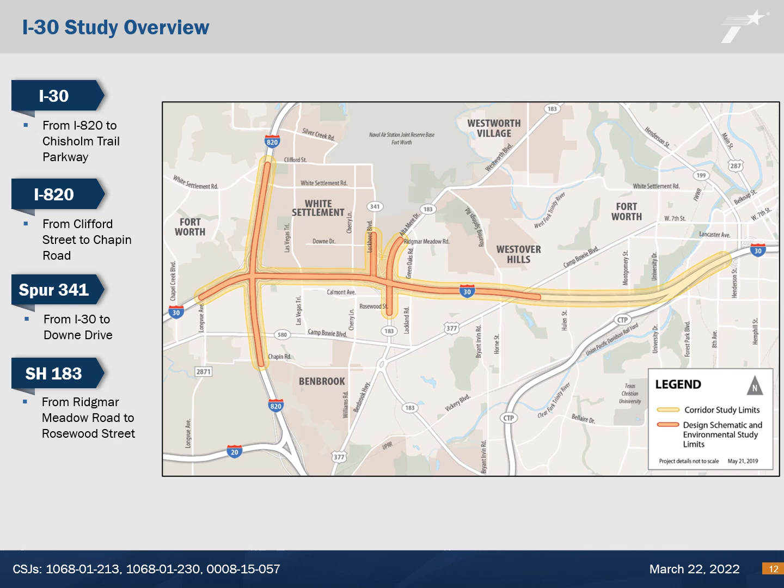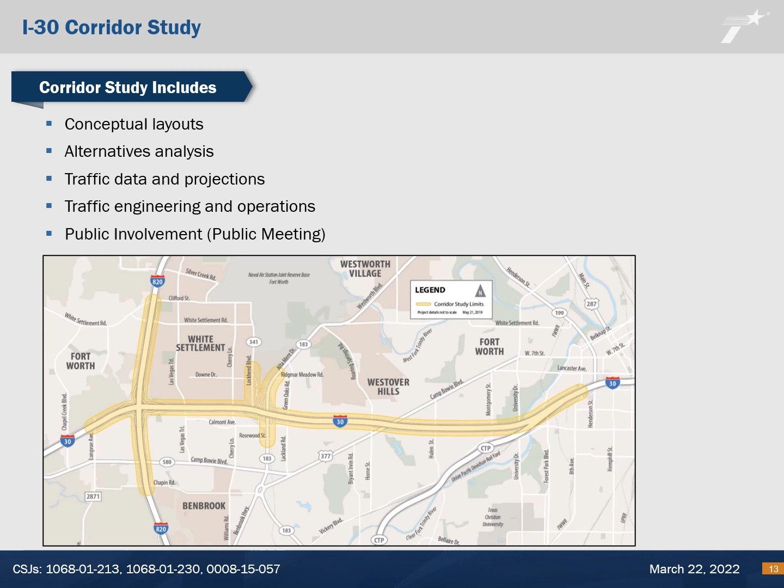The corridor study includes preparing conceptual layouts, an alternative analysis, traffic data and projections, traffic engineering and operations, and public involvement. The limits of the corridor are shown on the map in yellow. We are currently in this phase of the project.

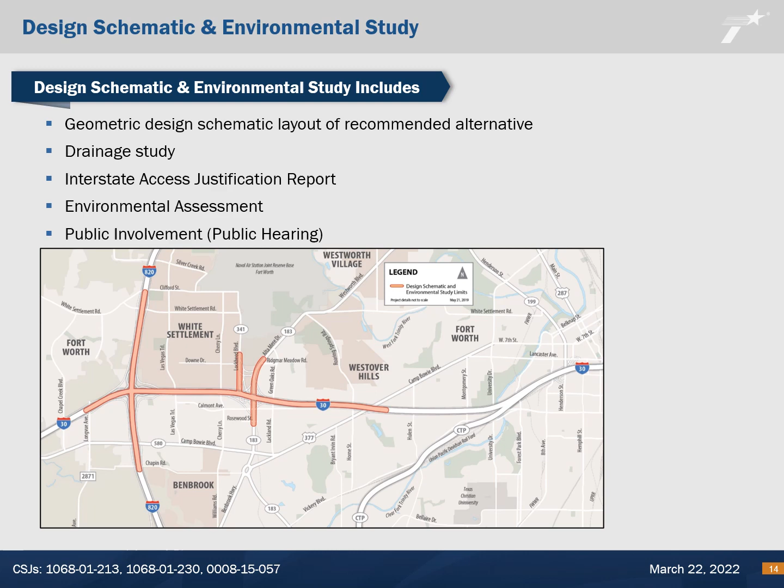The design schematic and environmental study stage of the project will include geometric design schematic layout of the recommended alternative, a drainage study, an interstate access justification report, an environmental assessment, and public involvement. The limits of the design schematic and environmental study are shown on the map in pink.

Following this public meeting, the proposed design will be refined per public meeting comments where feasible. Once this is complete, this resulting design will become the recommended alternative and will proceed to the design schematic and environmental documentation phase of the project.

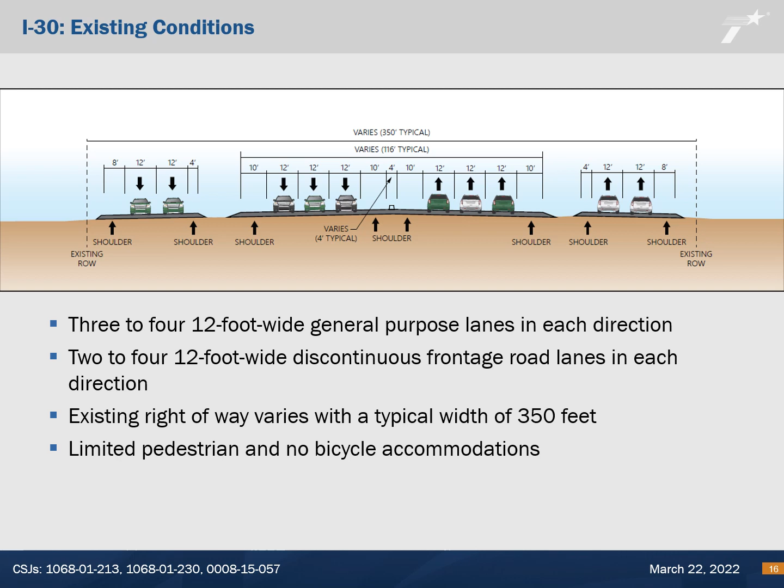An alternative analysis was conducted for the project to determine recommended improvements. The process started by evaluating various typical sections. The following typical sections were considered: no build, do nothing, a no build typical section maintaining 3 to 4 existing main lanes in each direction.

Additional general purpose lanes: a proposed typical section with the addition of 1 to 2 general purpose lanes in each direction. Concurrent express lanes: a proposed typical section with the addition of up to 1 general purpose lane and 1 concurrent express lane in each direction. Reversible express lanes: a proposed typical section with the addition of 2 reversible express lanes, with no additional general purpose lanes added.

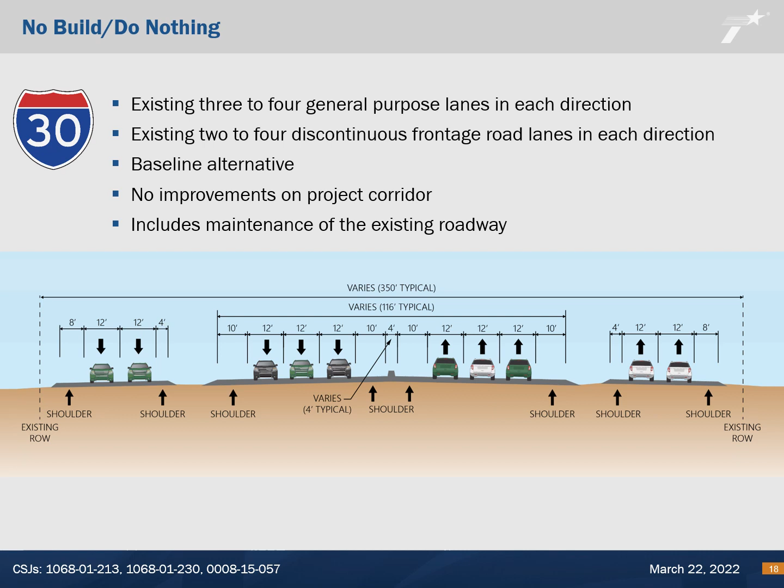The following slides will provide a brief description of each alternative and its typical section. The no-build do-nothing alternative would maintain the existing 3 to 4 general-purpose lanes and existing 2 to 4 discontinuous frontage road lanes in each direction. It would not include improvements to the project corridor, though it does include maintenance of the existing roadway.

The additional general-purpose lanes alternative would add 1 to 2 general-purpose lanes in each direction and pedestrian and bicycle accommodations. The alternative includes an evaluation of continuous frontage roads and would require additional right-of-way.

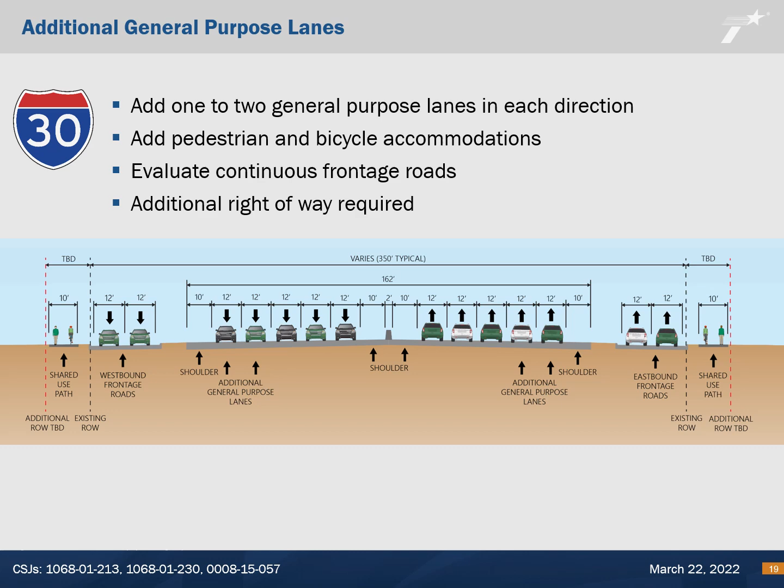Express lanes are typically built in the median of freeway corridors and separated from parallel traffic by barriers. Express lanes significantly have fewer entrance and exit ramps than parallel freeway lanes and allow through traffic to avoid congestion that results from local trips. Express lanes do not have a toll component, so they cannot guarantee a speed.

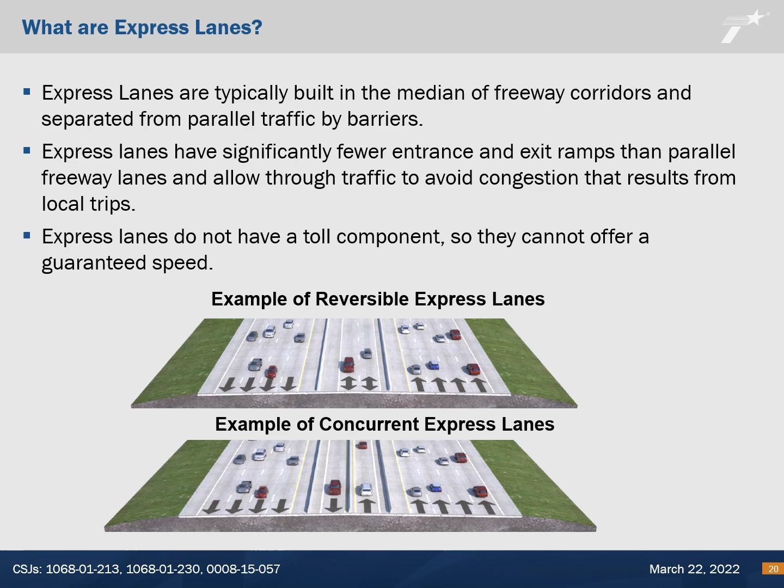The concurrent express lanes alternative would add up to 1 general purpose lane and 1 concurrent express lane in each direction, along with pedestrian and bicycle accommodations. The alternative includes an evaluation of continuous frontage roads and would require additional right-of-way. There was no tolling component considered with this alternative.

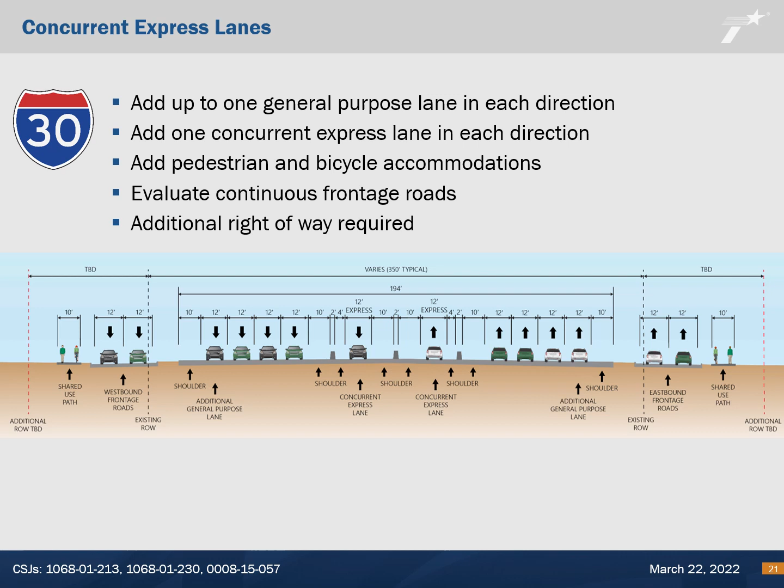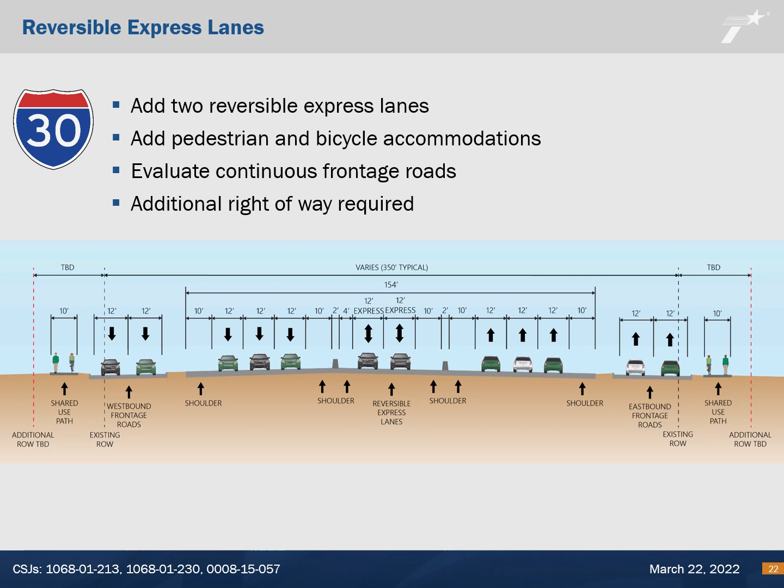The alternative analysis evaluation process begins with the development of 3 build alternatives and the no-build do-nothing alternative. The purpose of this evaluation is to compare the alternatives and identify those that would best achieve the study goals and objectives. See the project website for a larger version of the evaluation matrix.

Based on preliminary traffic analysis, this segment of I-30 has definitive peak hour directionality, meaning the morning traffic is significantly higher on the eastbound lanes and the evening traffic is significantly higher on the westbound lanes. The no-build do-nothing alternative could not accommodate future traffic.

Therefore, it was eliminated from further consideration. The 3 build alternatives were further evaluated with the following results. Because of the traffic directionality, concurrent express lanes would not be utilized to justify the significant right-of-way impacts.

Preliminary traffic analysis further concluded that reversible express lanes would not provide additional benefit compared to the additional general purpose lanes and would result in a larger right-of-way footprint, meaning there would be more right-of-way impacts.

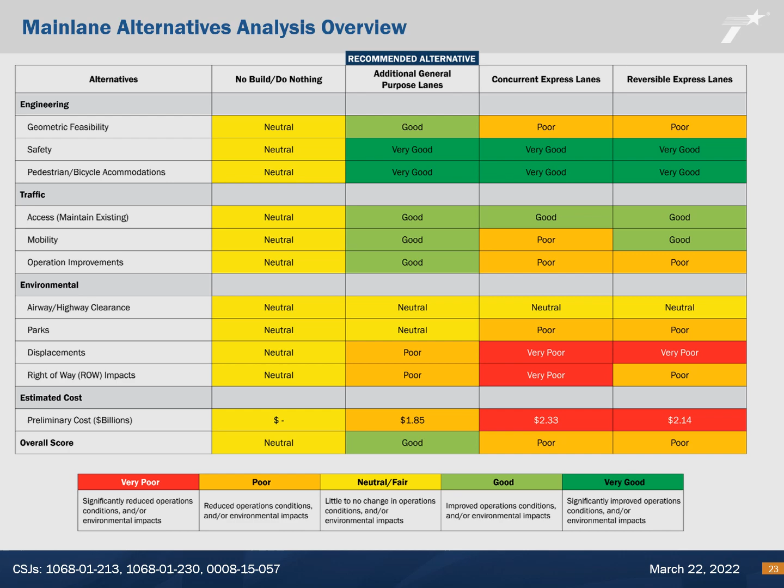The recommended alternative would provide 1 to 2 general purpose lanes in each direction, a 10-foot wide shared use path for bicycles and pedestrians in each direction, offset 5 feet from the frontage road curb, where reasonable and feasible. In areas where the shared use path is not feasible, at a minimum an 8-foot sidewalk would be provided.

Visit the project website at TxDOT.gov with the keyword search of I-30 West Corridor Study to see a roll plot of the recommended alternative. If you have any questions about the recommended alternative, please contact TxDOT for additional information.

Please note that as part of the alternative analysis, multiple interchange alternatives were evaluated at the Spur 341 and SH 183 interchanges, and we will go into further detail later in the presentation.

The interchange shown on the recommended alternative roll plot is one of the preliminary alternatives being considered. All interchange alternatives will be further evaluated as the analysis evolves, including traffic operations and feedback from this public meeting.

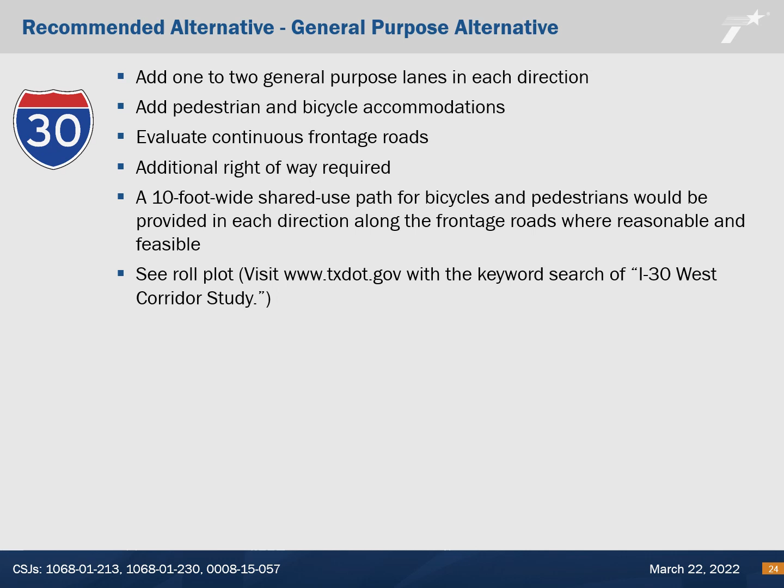The project team is evaluating deficiencies of the existing interchanges and has developed alternatives to reconstruct the Spur 341 and SH 183 interchanges to address the following safety, operational, and engineering deficiencies.

The current interchange does not meet current guidelines for engineering, does not enhance safety, does not provide pedestrian and bicycle access, does not operate well with today's traffic, and the interchange operation and traffic mobility will continue to deteriorate over time as traffic increases.

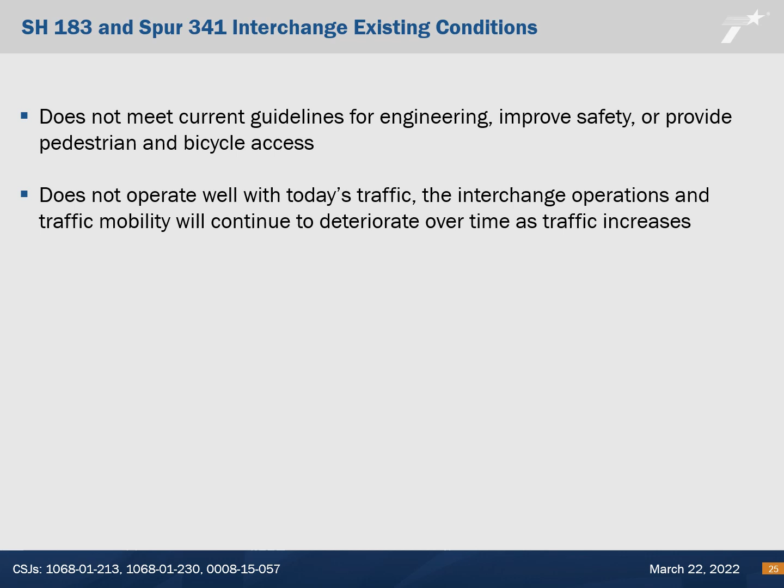2 alternatives were removed from consideration due to geometric feasibility or input from the February and March 2021 series of stakeholder meetings. Those include the SH 183 split diamond with westbound I-30 to northbound SH 183 direct connector, and the Spur 341 and SH 183 one-way pair.

The existing I-30 loop ramps to and from Spur 341 and SH 183 would be removed. The proposed exit and entrance ramps, both directions, would serve both 341 and SH 183. Compared to the no-build, the benefits to this alternative are the significant potential surplus of right-of-way, access to Spur 341, SH 183, and Cherry Lane, and consistency with driver expectation or familiarity.

The challenges are the multiple signalized intersections on the frontage road. The cost of this alternative is approximately $111 million.

The existing I-30 loop ramps to and from Spur 341 and SH 183 would be removed. A diverging diamond interchange is proposed at I-30 and SH 183. This interchange type enhances safety and mobility and is similar to the interchange at SH 121/Sam Rayburn Tollway at South Colony Boulevard in the Colony, Texas, near Nebraska Furniture Mart.

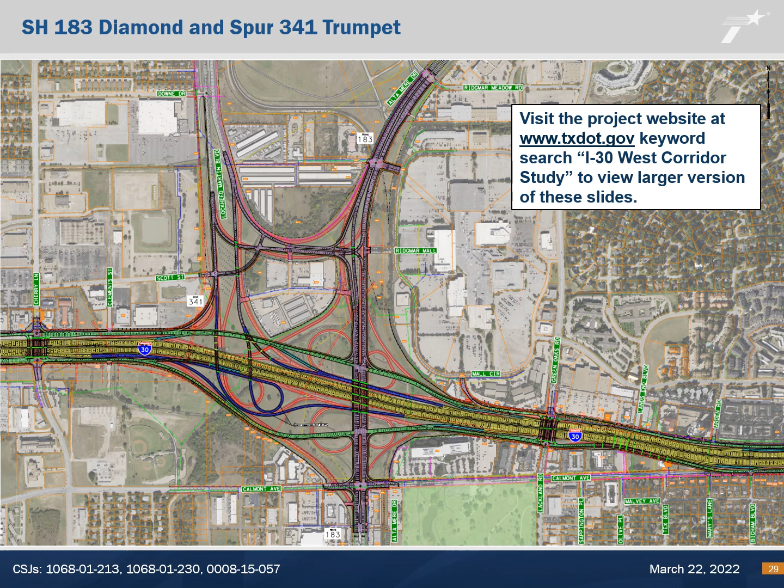The challenges are a 3-level interchange because of the height of the interchange within proximity to the Joint Reserve Base flight path, low-speed connections to Spur 341, and right-of-way impacts on the northwest corner of Spur 341. The cost of this alternative is approximately $106 million.

The existing I-30 loop ramps to and from Spur 341 and SH-183 would be removed. Traditional I-30 entrance and exit ramps are proposed to and from SH-183. 3 direct connections are proposed for Spur 341: eastbound I-30 to northbound Spur 341, southbound Spur 341 to eastbound I-30, and westbound I-30 to northbound Spur 341.

Southbound Spur 341 to westbound I-30 would access to Frontage Road and go through the Cherry Lane signal. Compared to the no-build alternative, the benefits with this alternative are the significant potential of surplus right-of-way, access to Spur 341, SH-183, Cherry Lane, and reduced weaving on I-30 and proposed frontage roads.

The challenge is that there would be no direct I-30 westbound access to Cherry Lane. The cost of this alternative is approximately $119 million.

The existing I-30 loop ramps to and from Spur 341 and SH-183 would be removed. This alternative provides full access to and from SH-183 and Spur 341. Direct access is also provided to and from Cherry Lane.

Compared to the no-build alternative, the pros with this alternative are substantial potential surplus right-of-way, access to Spur 341, SH-183, Cherry Lane, and SH-183 traffic will bypass the intersections with the frontage roads.

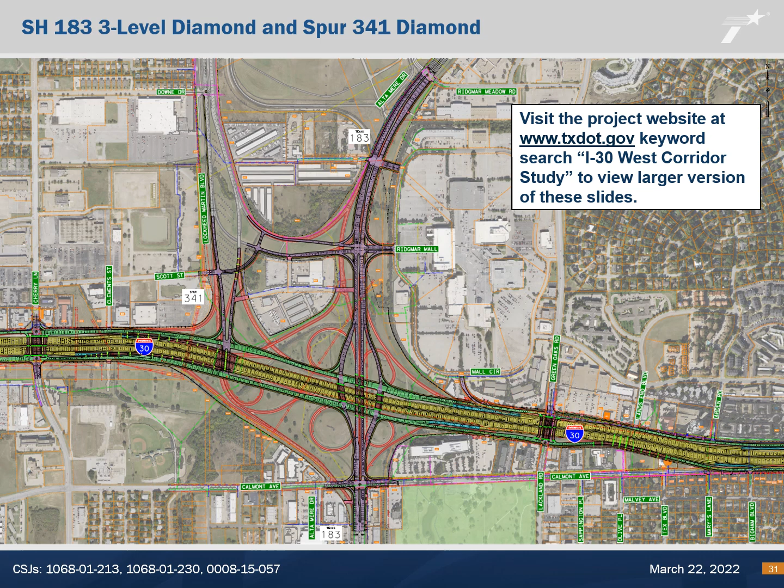The cons are a 3-level interchange because of the height of the interchange within proximity to the Joint Reserve Base flight path, and additional signals along the frontage roads. The cost of this alternative is approximately $129 million.

The existing I-30 loop ramps to and from Spur 341 and SH-183 would be removed. A half-divergent diamond interchange is proposed at I-30 and Spur 341. This interchange type enhances safety and mobility since one travel direction does not extend past the interchange, limiting access to only 3 directions. Direct connections are proposed to and from Cherry Lane.

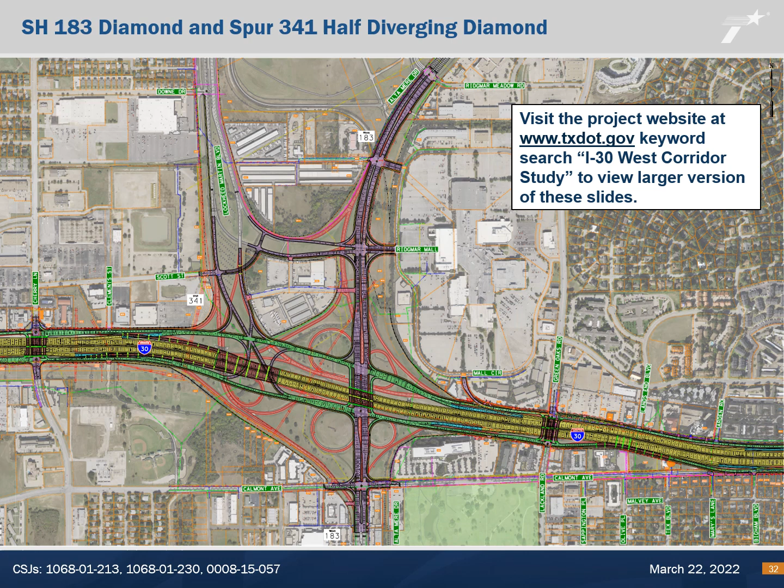Compared to the no-build alternative, the benefits with this alternative include the potential surplus of right-of-way, access to Spur 341, SH-183, Cherry Lane, and improved mobility. The challenges are driver expectancy or familiarity, combined I-30 exits to Spur 341 and SH-183, and multiple signalized intersections. The cost of this alternative is approximately $121 million.

This alternative was proposed by the North Central Texas Council of Governments. The existing I-30 loop ramps to and from Spur 341 and SH-183 would be removed. A traditional diamond interchange is proposed both directions of I-30 to and from SH-183. Direct access is proposed for all directions of Spur 341 and to and from I-30.

A roundabout is proposed to connect Scott Street, Ridgmar Mall, and Spur 341. Direct access is provided to Cherry Lane. Compared to the no-build, the benefits with this alternative include the potential surplus of right-of-way, access to Spur 341, SH-183, Cherry Lane, and reduced weaving on I-30 and proposed frontage roads.

The challenges include driver expectancy or familiarity associated with the roundabout, lower design speed for the connection from southbound Spur 341 to westbound I-30, and cost. This is the most expensive of the alternatives, estimated at approximately $149 million.

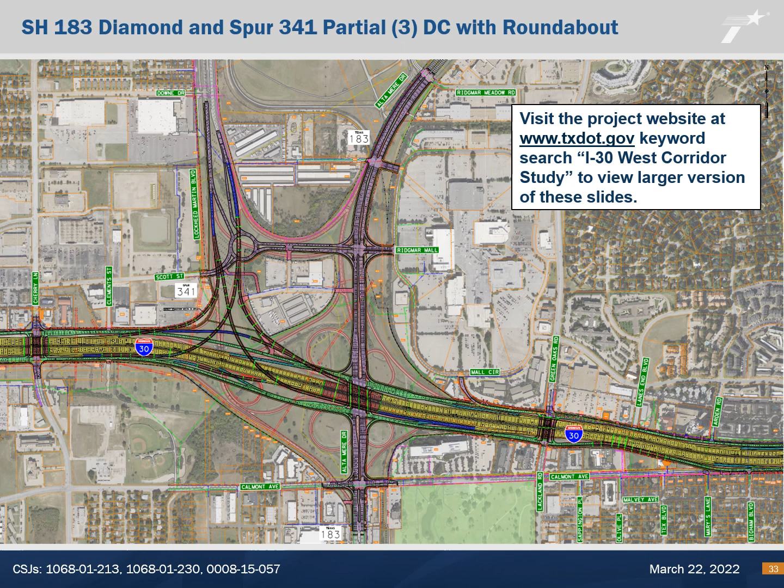The alternative analysis evaluation process begins with the development of build alternatives and the no-build, do-nothing alternative. The purpose of this evaluation of alternatives is to compare the interchange alternatives and identify those that would best achieve the study goals and objectives.

See the project website, TxDOT.gov, for a larger version of the interchange evaluation matrix. Similar to the main lane evaluation matrix, the following categories were identified as the initial basis or criteria for evaluating the interchange alternatives: engineering, traffic, environmental, and estimated cost.

The results of the alternatives comparison are shown in the slide. The criteria rating used in the comparative evaluation of alternatives includes 5 levels of degree. The ranking system is shown in the table.

Further geometric and traffic analysis are necessary and will be a part of the next phase of the study to determine the proposed interchange at I-30 and Spur 341, SH 183.

Public comments received from this public meeting will be considered to refine alternatives and continue more detailed analysis to provide the best interchange alternative that meets the study goals.

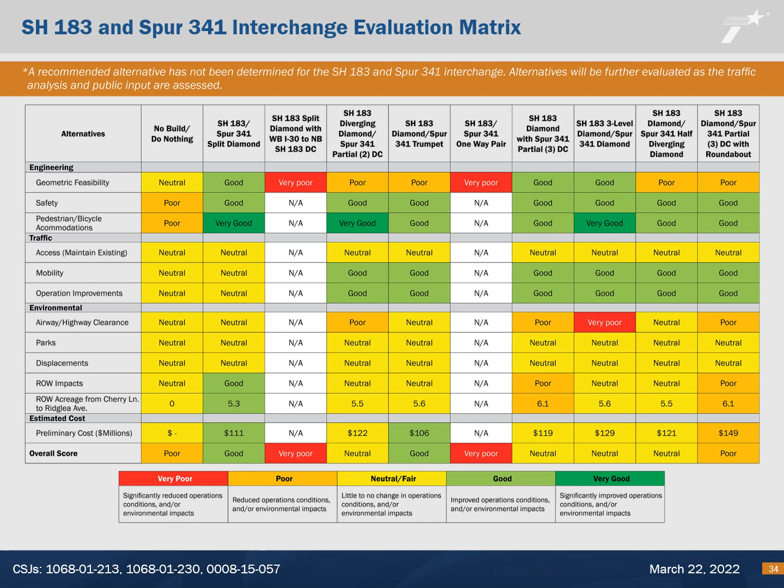The I-30 study is federally funded. When a study or project receives federal funding, TxDOT is required to assess the potential environmental effects of the proposed project. The National Environmental Policy Act, or NEPA process, requires analysis of the potential impacts to the natural and man-made environment and helps the decision maker make an informed decision on whether to proceed with the project.

Prior to December 16, 2014, the Federal Highway Administration, or FHWA, reviewed and approved documents prepared under the National Environmental Policy Act, known as NEPA. However, on December 16, 2014, TxDOT assumed responsibility from FHWA to review and approve certain assigned NEPA environmental documents. This Memorandum of Understanding was renewed on December 9, 2019, and this review and approval process will apply to this project.

This virtual public meeting presented by TxDOT is provided to share information and encourage comments from the public regarding the proposed I-30 West Corridor project.

As a part of the project scope, TxDOT tasked the engineering consultant to determine the environmental resources to be analyzed, conduct fieldwork to determine potential environmental constraints, and document those findings in the preparation of the NEPA document. The technical documentation for this project will address the potential impacts identified during the engineering and design phase of the proposed project. These areas of potential impact include natural, social, and cultural resources, as well as potential impacts to adjacent and surrounding land use.

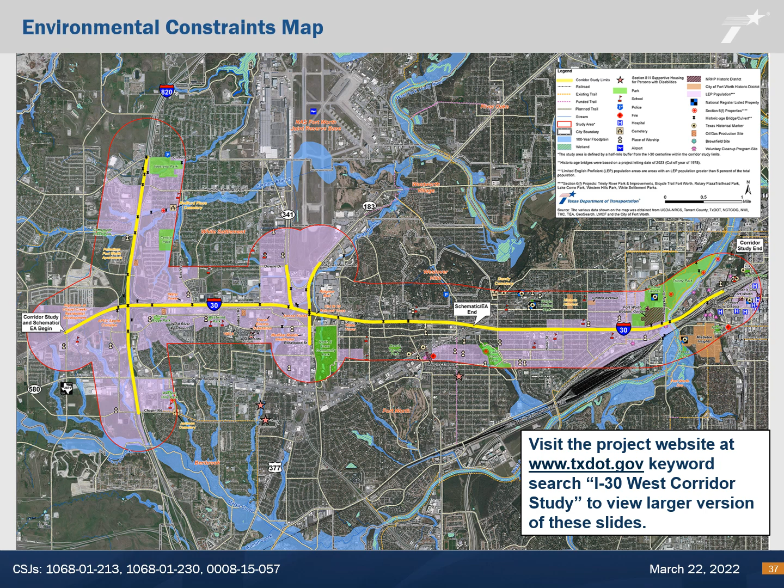Currently, the project is in the corridor study phase that includes preparing conceptual layouts, an alternative analysis, gathering traffic data and projections, traffic engineering and operations, and public involvement. The limits are shown in yellow. The corridor study is expected to be completed in early 2023.

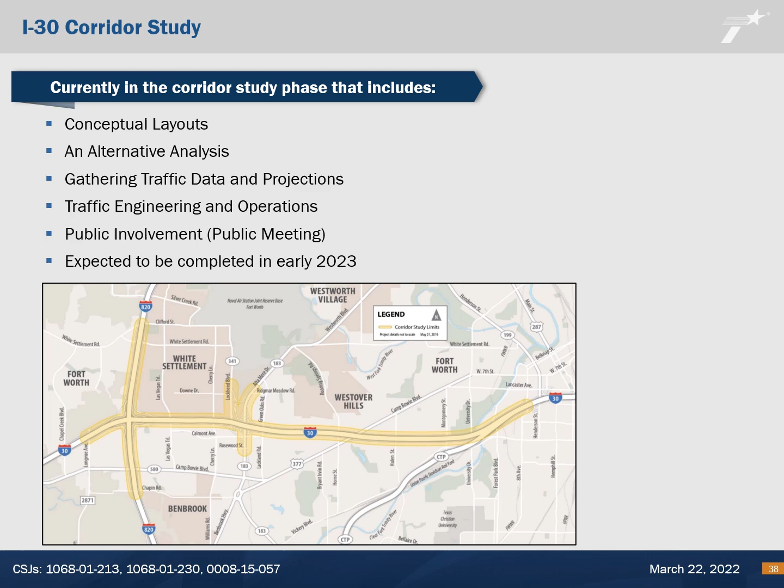The next phase includes the design schematic and environmental study. The NEPA process includes public involvement and proactively engaging stakeholders and seeking public input. This slide highlights the steps of the project development process and tentative project schedule for I-30 from 820 to Camp Bowie Boulevard. The draft preliminary schematic layout is anticipated in early 2024.

The draft environmental document and a public hearing are both anticipated to be completed at the end of 2024, early 2025. Upon approval of the environmental document, environmental clearance would follow and is anticipated in mid-2025. The development of the environmental documents for the portion of the study along I-30 from Camp Bowie to Chisholm Trail is expected to have a separate study and to be prepared in the future.

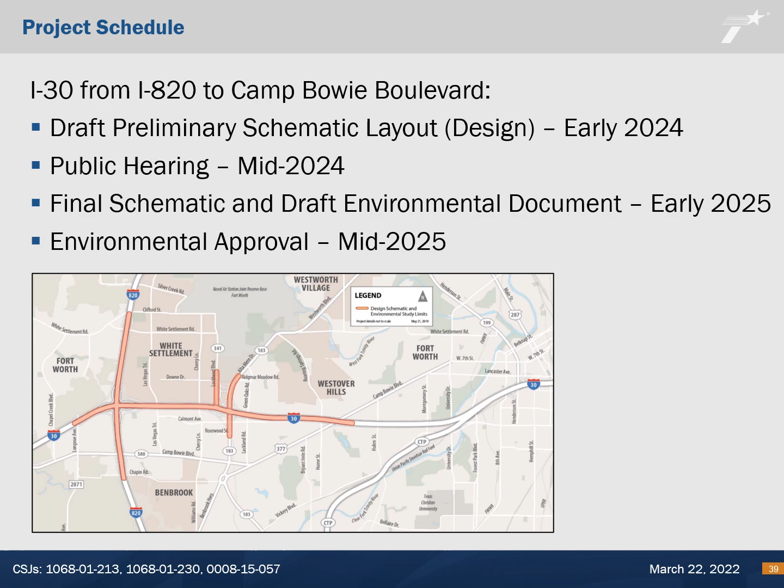Future phases of the project, including final design plans, right-of-way acquisition, and utility relocations, have not been scheduled and would be determined at a later date. Funding for the project is still being identified. Limited funding is expected to be available for breakout projects to address high-priority area needs in the corridor. These breakout projects have not yet been identified. Your feedback is appreciated to help identify potential breakout projects.

For your convenience, we invite you to view all information developed for this project online at txdot.gov, keyword search I-30 West Corridor Study. Materials such as the draft schematic, constraints map, and alternative layouts are available for viewing at this virtual public meeting. Project questions are welcome throughout the project development process.